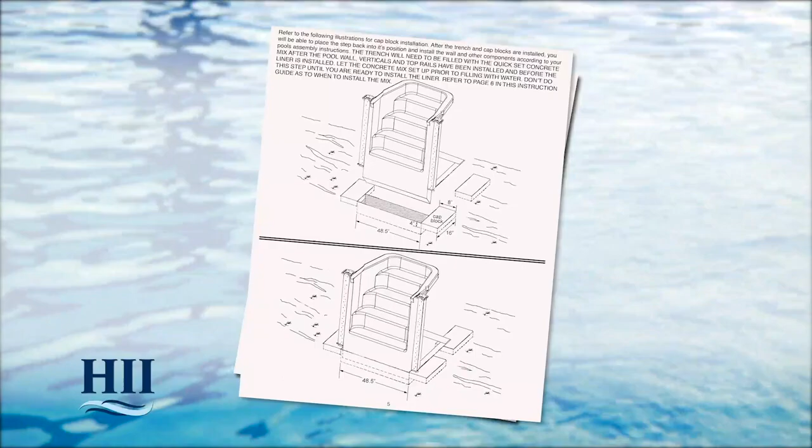This installation video is designed to supplement HII's pool assembly and installation instructions for your style of pool. This video does not replace the written instructions. Be sure to read all instructions carefully prior to installation. Check to see if building permits or utility clearances are required, and obey all codes for fencing and electrical safety. Refer to your pool assembly and installation instructions.

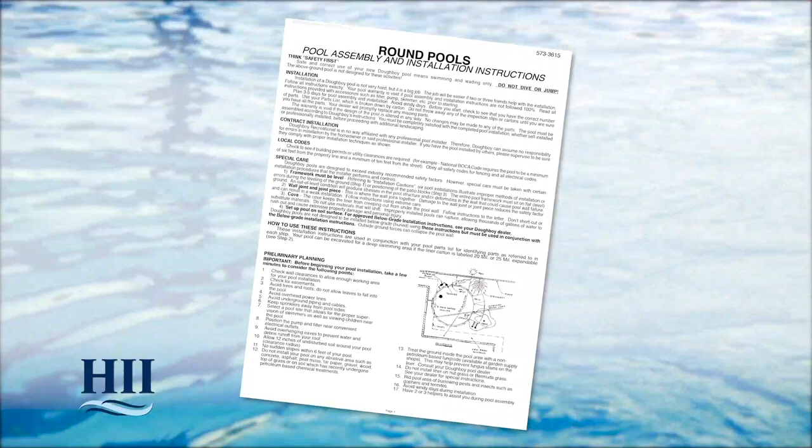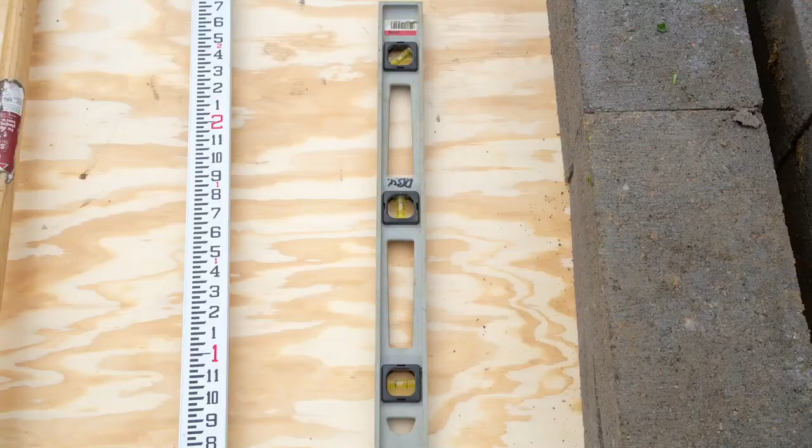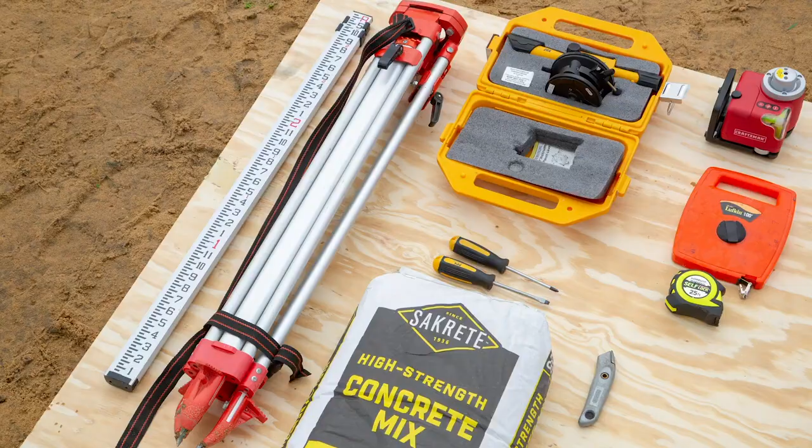Tools and materials. In addition to the tools and materials required in the pool assembly and installation instructions for your pool, you will need the following items: a 2-foot carpenter's level, a 1/4-20 by 1-inch slotted or Phillips head screwdriver, sharp utility knife, a flat end shovel to help with a more precise excavation, a round shovel, measuring tape. A transit or builder's level is recommended to help with leveling the in-wall pool step.

You will need 8 4-inch by 8-inch by 16-inch solid concrete cap blocks and 5 60-pound bags of quick-set concrete for the step trench.

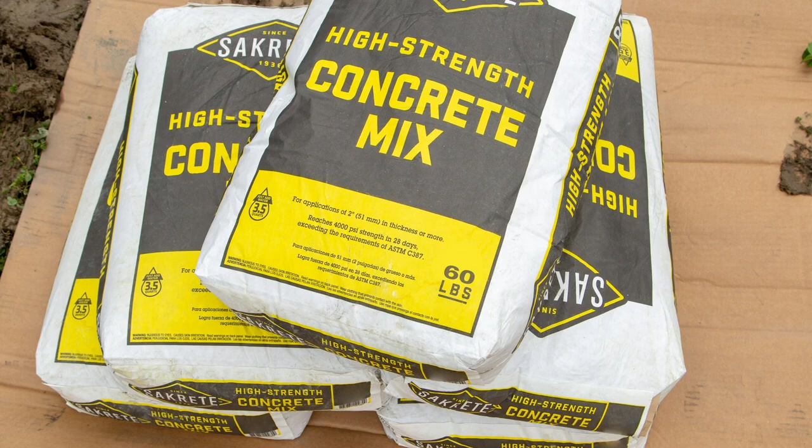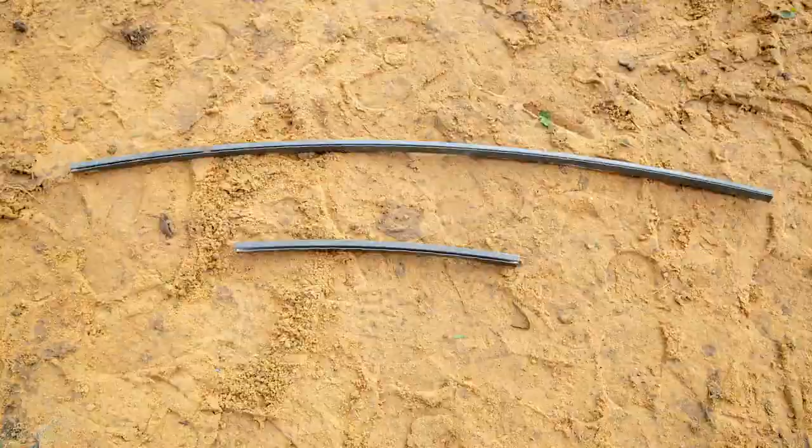Important: the step is installed in place of one bottom rail and top rail section for most pools. Some round pools with extra long bottom rails will require the use of 2 short bottom rails and 2 short top rails to make up the distance. Refer to Figure 4A as illustrated in your written instructions for an example.

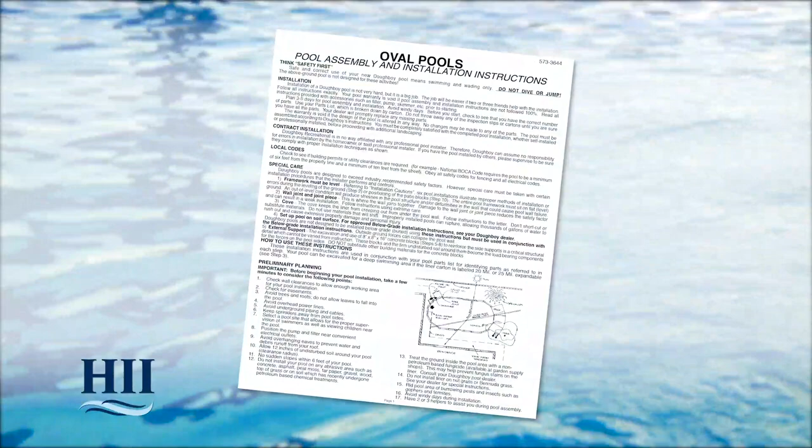The step is intended to be used in-ground or with a deck. The step must have a deck support around it to prevent any misuse entering or exiting the pool. Follow the directions in your pool's assembly guide until you have completed the section on laying out the bottom rail framework. See Figure 1 in the in-wall pool step instructions.

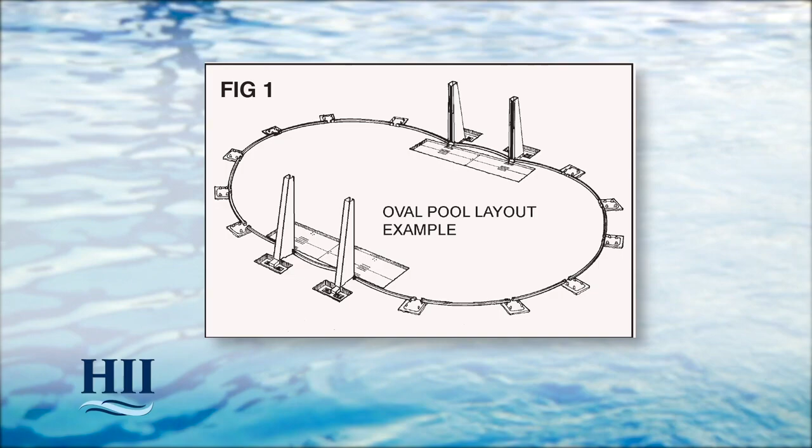At this point, you will need to decide where you want to locate the pool step. Remember, the step can only be located at the radius ends of an oval. See Figure 2 in your in-wall pool step instructions.

The skimmer and return holes in the pool wall will be located to the left of the step when standing inside the pool area and facing the step, so keep this in mind when locating the pool step.

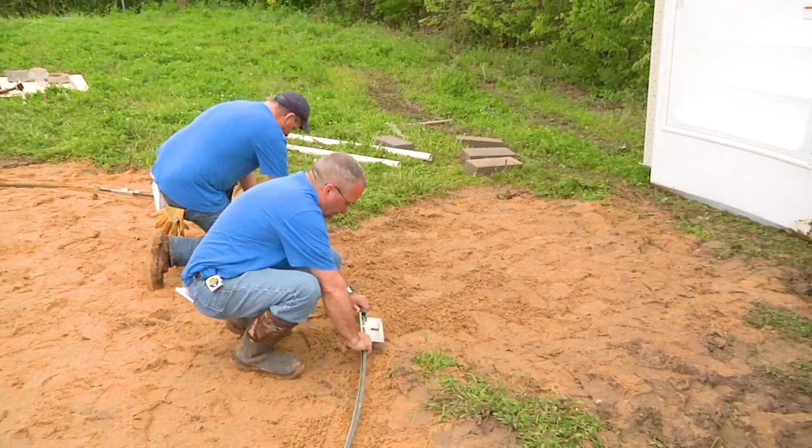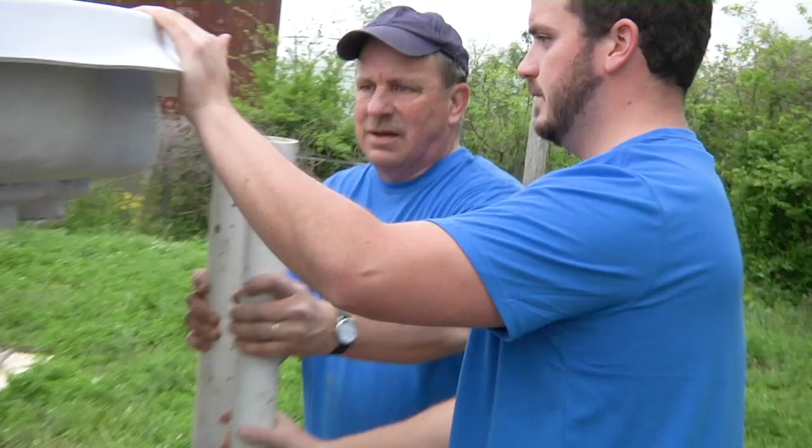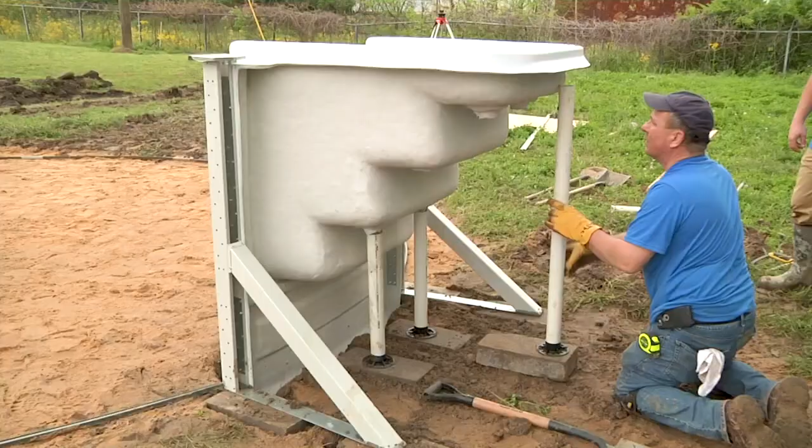Locate the PVC support pipes to temporarily support the steps while positioning cap blocks. The diagram shows cap blocks numbered 1 through 8 and dimensions for the support pipe locations when centered on the cap blocks numbered 5 through 8.

Locate the area where the blocks 1 through 4 will be placed. The cap blocks are required and must be used to prevent the support post and the support brace from sinking into the ground. Warranty will be voided if not used.

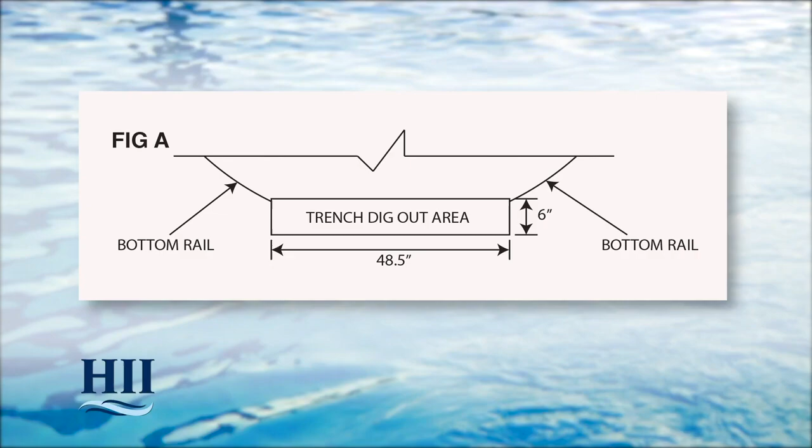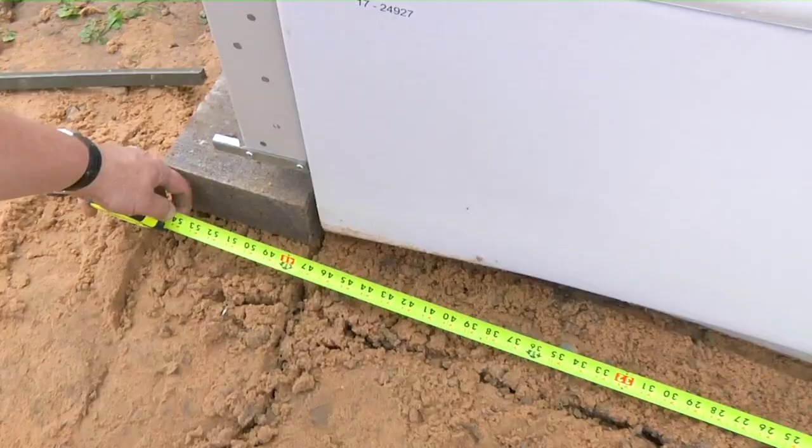Refer to Figure A in your in-wall pool step instructions for help marking out an area for the step trench. Mark a 3-inch trench in the front of the step and a 3-inch trench in the back of the step, for a final trench size of 6 inches by 48.5 inches by 12 inches for the bottom of the step to rest in. Now you may remove the step for excavation of the trench and blocks 1 through 4.

Make sure all the blocks are level to the surrounding area. Once the trench is excavated, you will be able to place the step in its location.

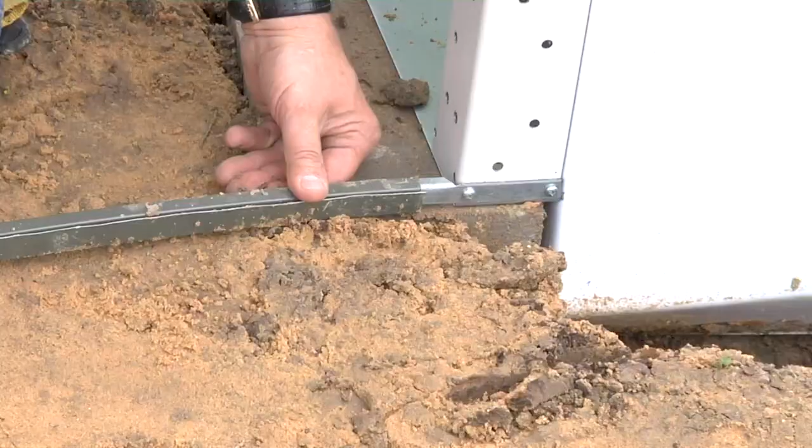With help, position the step assembly in place and insert the bottom rails onto the bottom rail locators on each side of the step. Now locate the position of blocks 5 through 8.

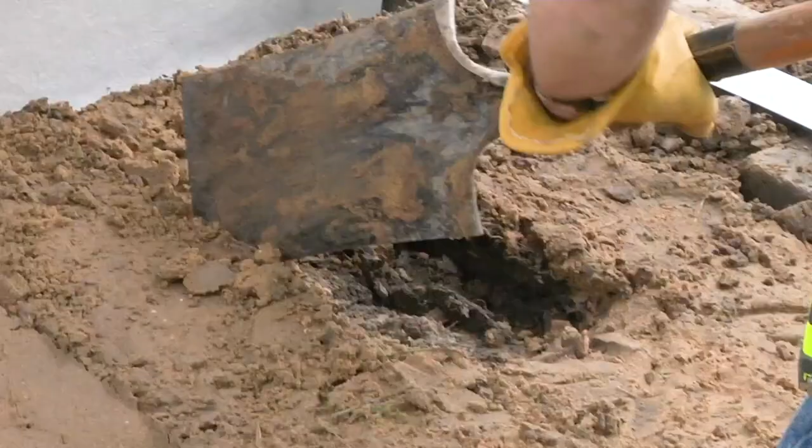Scribe the blocks. Excavate blocks 5 and 6 first. Make sure all blocks are level with the surrounding area.

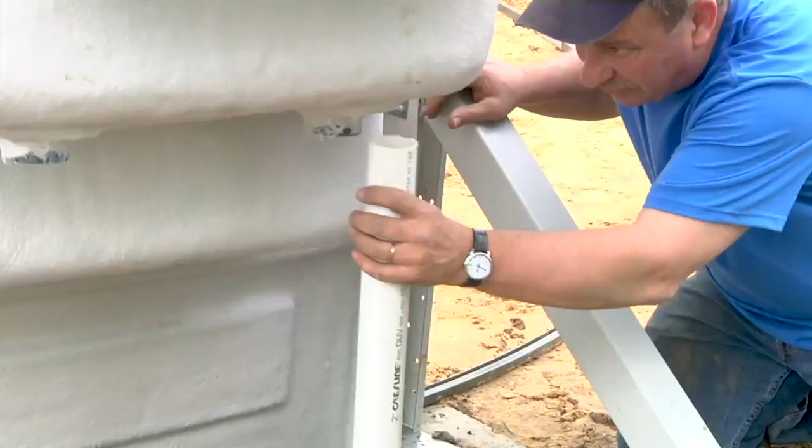Next, determine the length of the PVC pipes for each block. Cut the size and insert pipe into the hole of the step. Repeat these steps for all pipes and cap blocks.

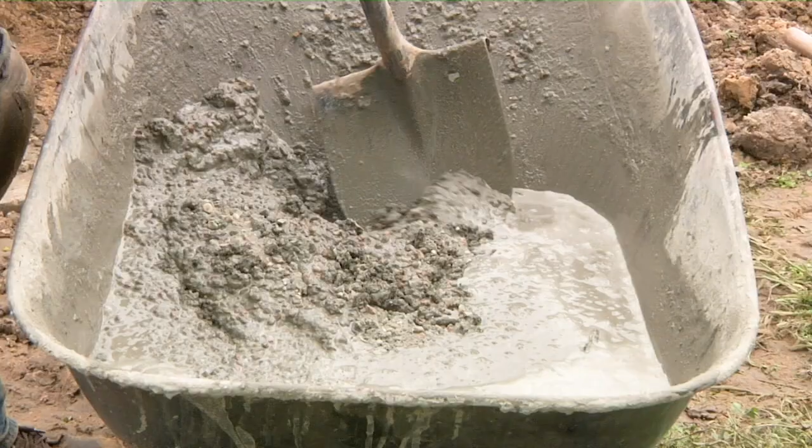Make sure the step sits level on top of the patio blocks and adjust if needed. The trench will need to be filled with quick-set concrete mix after the pool wall, verticals, and top rails have been installed and before the liner is installed.

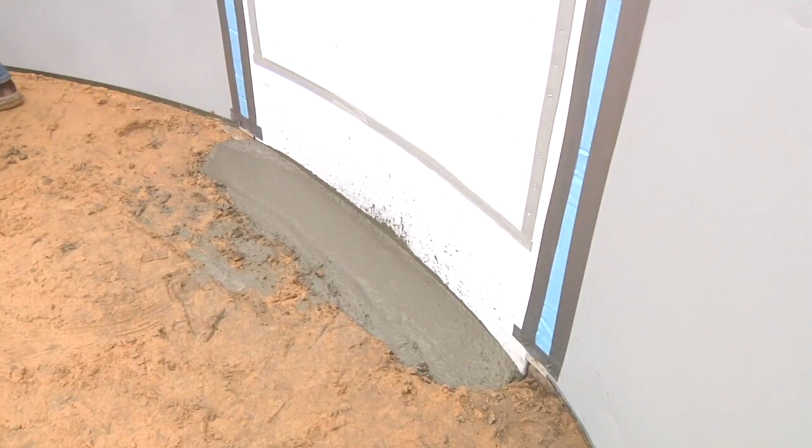Let the concrete mix set up prior to filling with water. Don't perform this step until you are ready to install the liner.

Refer to your instruction guide as to when to install the mix. Be sure to measure the diameter of your bottom frame once the step is in place to make sure the diameter is correct for your pool size. No cutting of top rails or bottom rails is needed.

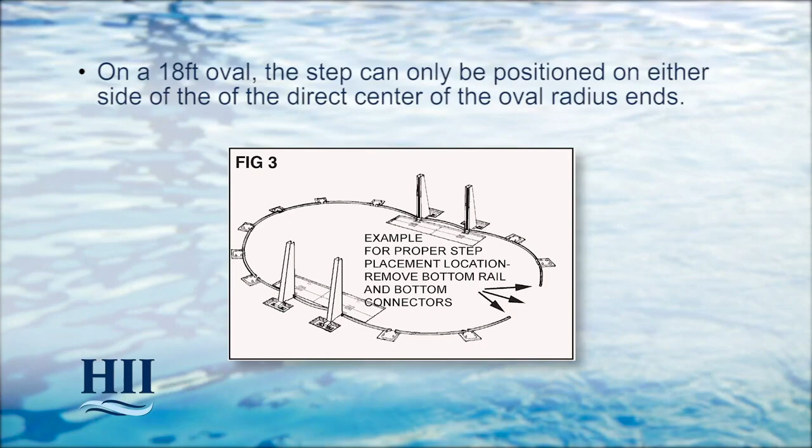On an 18-foot oval, the step can only be positioned on either side of the direct center of the oval radius ends. Refer to Figure 4B on page 2 for step placement and short bottom rail placement.

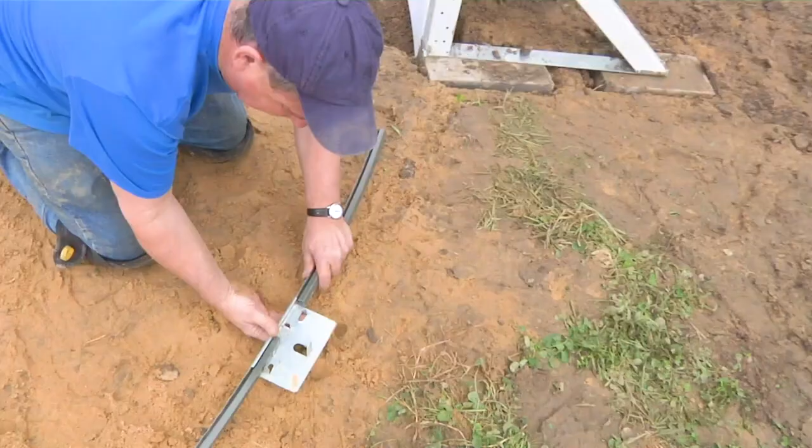If your pool came with 2 short bottom rails, the short bottom rails are placed on the bottom rail locators and bottom connectors closest to the step as shown. There will also be 2 shorter top rails that will be used where the shorter bottom rails are located.

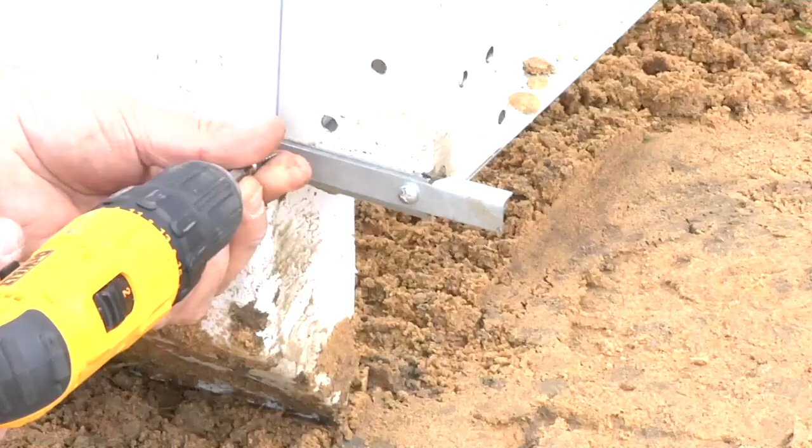If your pool step doesn't have the bottom rail locators already assembled, attach the left and right bottom rail locators to the bottom of the step as shown in your in-wall pool step instructions.

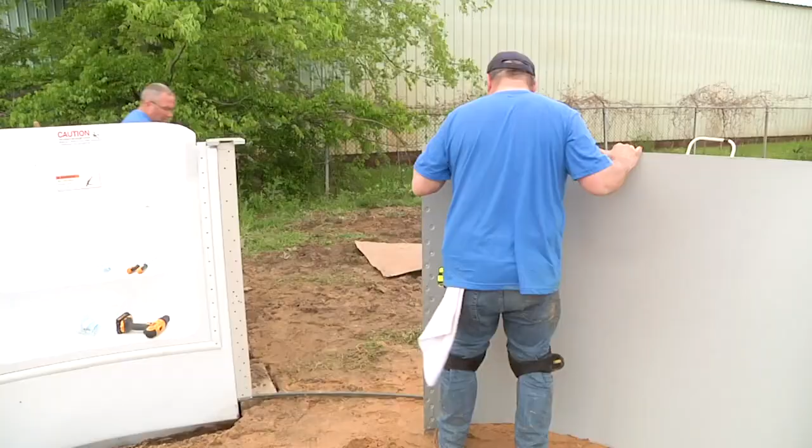Refer to your pool's assembly guide about installing the wall before starting this step. Start the pool wall on the right side of the step assembly by uncoiling the pool wall about 6 to 10 feet and insert the bottom edge into the groove in the bottom rail track.

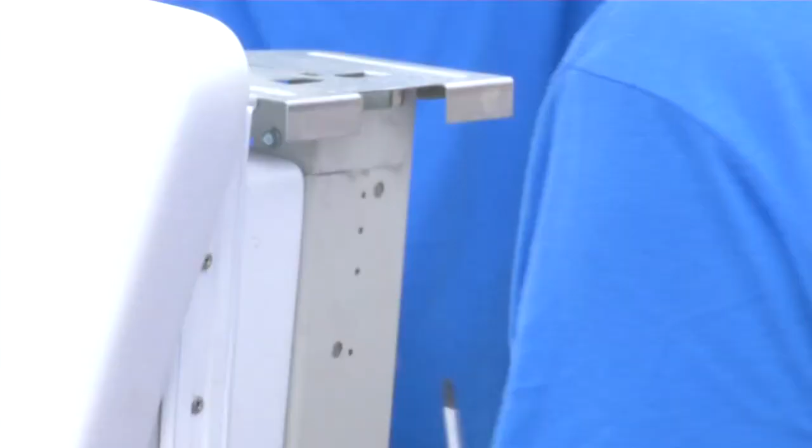Slide the end of the wall jointly towards the step until the holes in the wall joint line up with the holes in the step vertical. Be sure the top edge of the wall slides under the vertical end cap before fastening wall to vertical.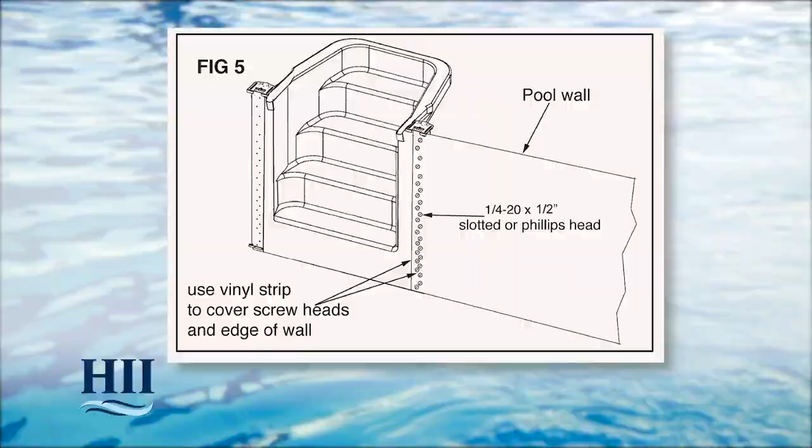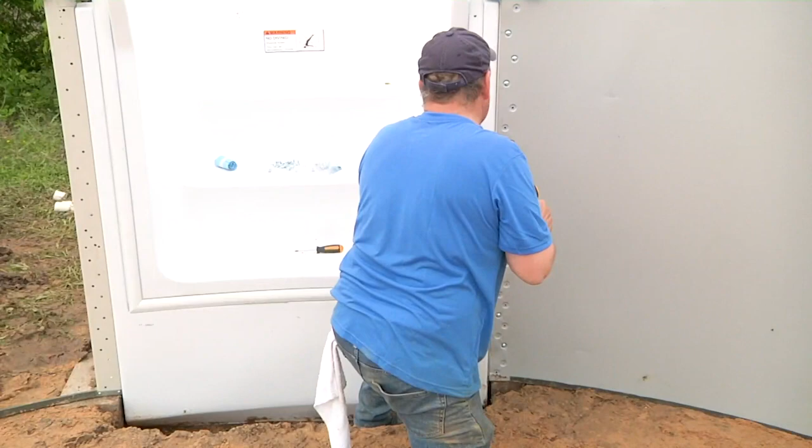See Figure 5. Insert a 1/4-20 by 1/2 inch long panhead screw with the screw head to the inside of the pool wall and a 1/4-20 lock nut on the inside of the vertical. Loosely attach all the screws and nuts first, then tighten them securely.

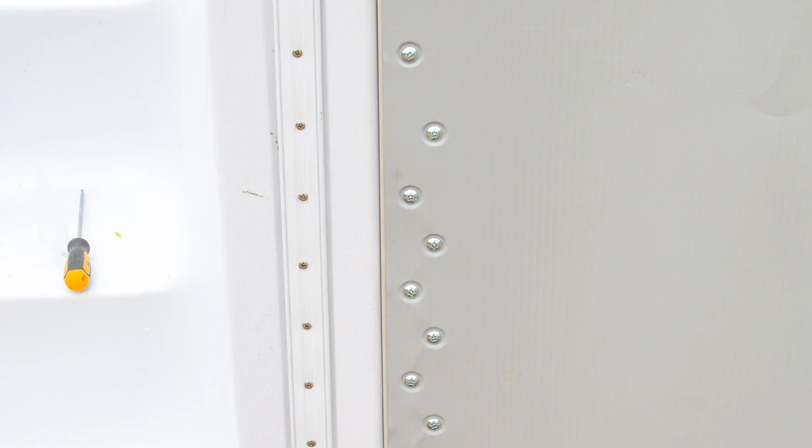Recheck the tightness of the screws and nuts at least twice to ensure a proper seat. File off any sharp burrs on the screw heads. Then place the protective wall strip over the screws and the edge of the pool wall and secure with duct tape. Be careful and do not get any tape over the gasket sealing area.

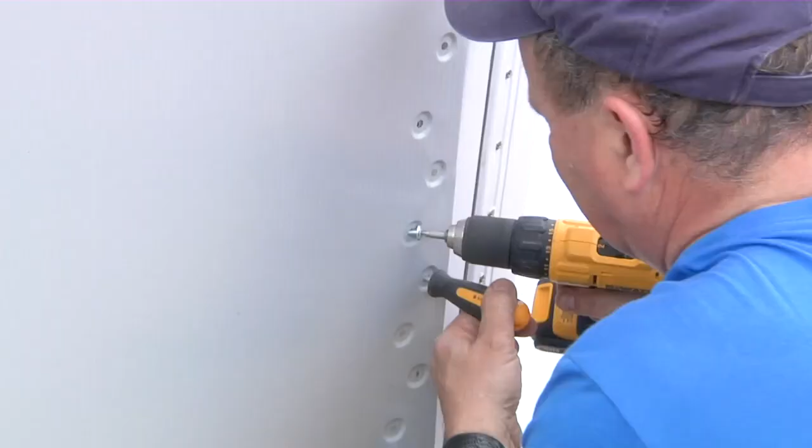Finish installing the wall around the perimeter of the pool until you reach the other side of the step and repeat the steps above to attach wall to step vertical.

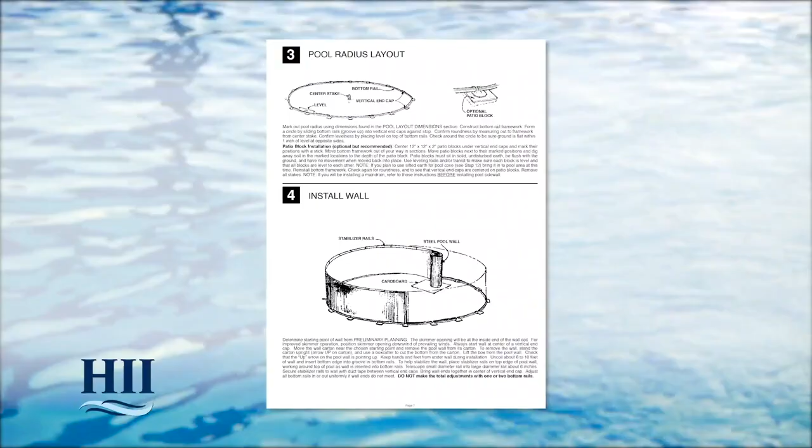Refer to your pool's assembly guide for directions on installing the wall to help ensure the wall is installed correctly. When installing the bead receiver for a beaded liner, stop the receiver on the outside edge of the step and over the gasket.

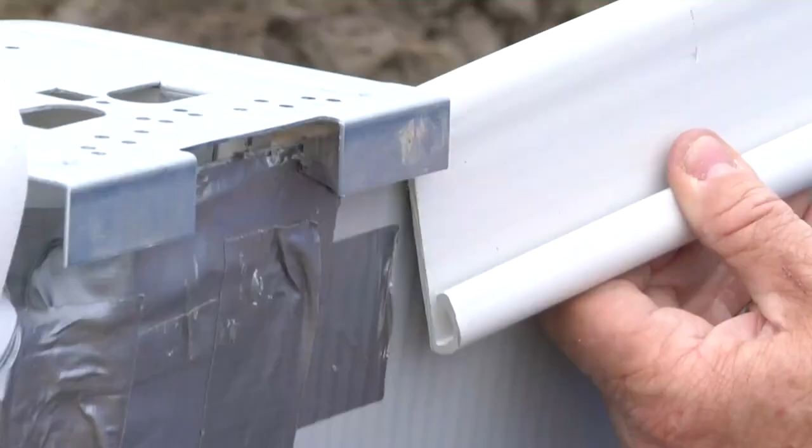You will need to cut approximately 1.5 inches off the top of the step faceplate so it will fit at the bottom edge of the bead receiver. See illustration at the bottom left of page 3.

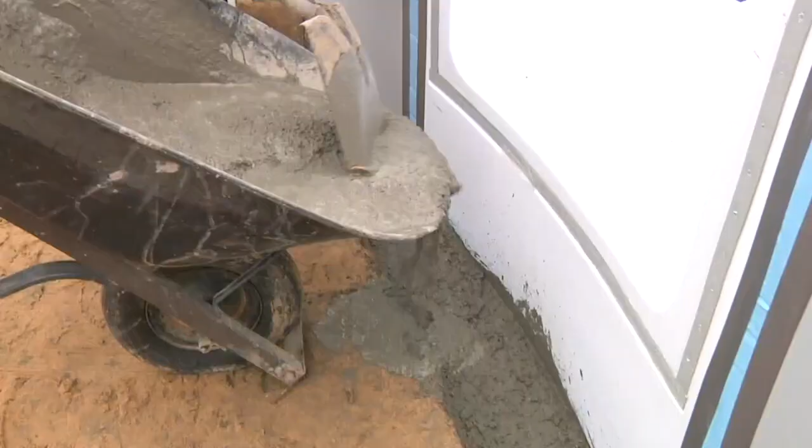Now is the time to fill the trench with quick-set concrete mix. Fill the trench with the mixture from the inside and outside of the step and let it cure before installing the liner. If the mixture does not completely fill the trench, fill the remaining area with dirt and pack down firmly so it is level with the surrounding area.

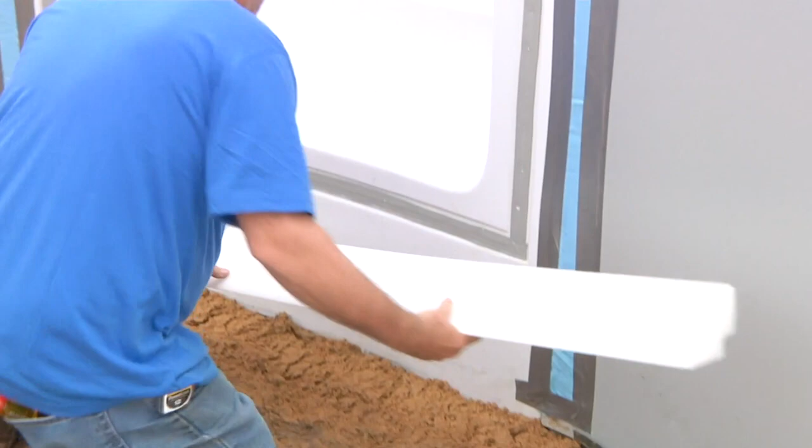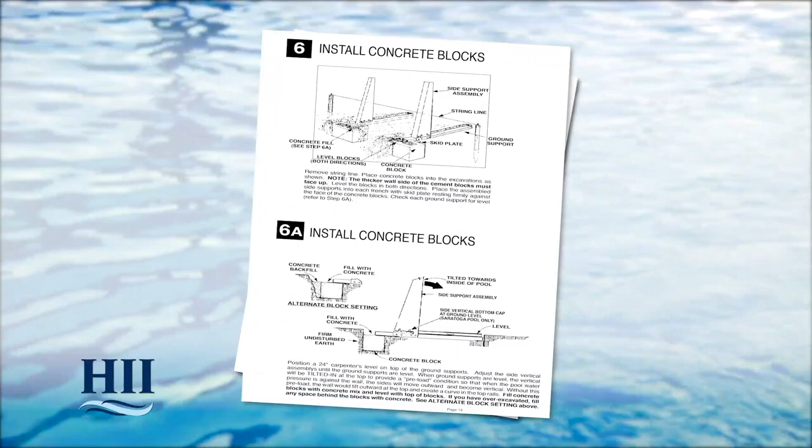You will need to place a piece of preformed cove or build a dirt earth cove at the base of the pool step approximately 4 inches high. Return to your pool's assembly guide to install verticals, top rails, and other hardware and pool cove.

Before you install the liner, you will need to remove the faceplate strips from the step. Make sure the gasket remains attached to the step.

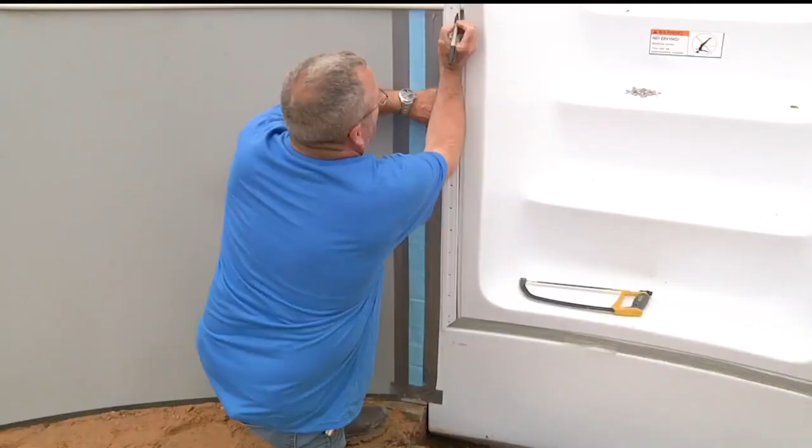When installing the bead receiver for a beaded liner, stop the receiver on the outside edge of the step and over the gasket. You will need to cut off a portion from the top of the step faceplate so it will fit at the bottom edge of the bead receiver.

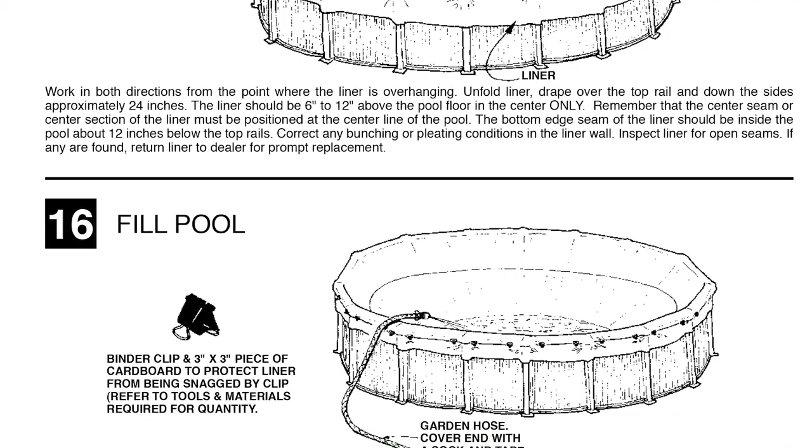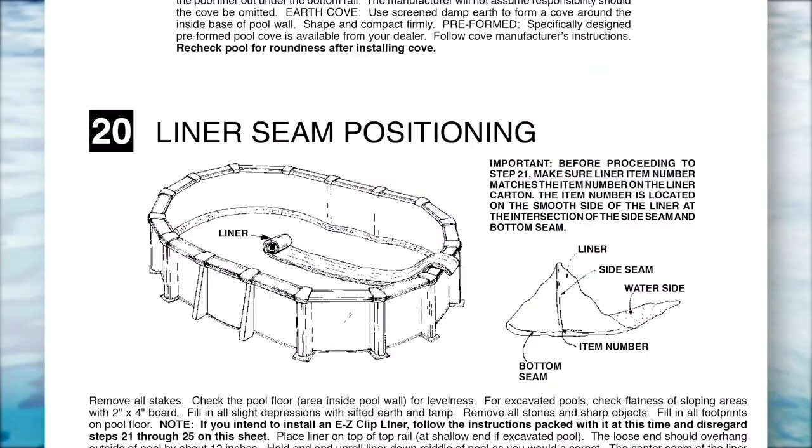Install the liner per the instructions included with the liner or your pool's assembly guide. If you are installing a beaded liner, you will need to start the liner on each side of the step approximately 6 feet, then continue around the pool installing the liner into the bead receiver. Before installing an oval liner, make sure the liner is aligned correctly with the pool layout.

Water method option for setting pool liner. When you start filling the pool with water, you will need to pay close attention to the liner at the step area for any wrinkles and adjust them as needed immediately. You will not be able to do this once the water level reaches a certain depth because there will be too much weight on the liner to press out any wrinkles.

When the water depth is approximately 10 inches for 52-inch tall pools or 12 inches for 54-inch tall pools, and the liner is against the pool wall at the bottom, you will fasten the bottom faceplate strip to the pool step first using the supplied screws.

Sandbag option for setting pool liner. Refer to instruction guide.

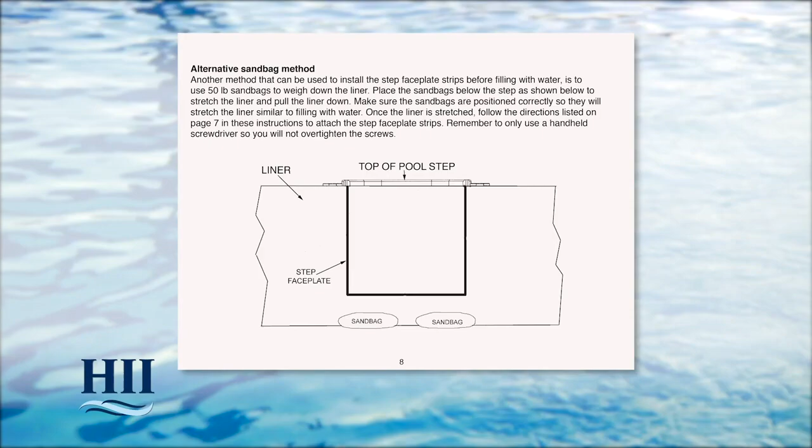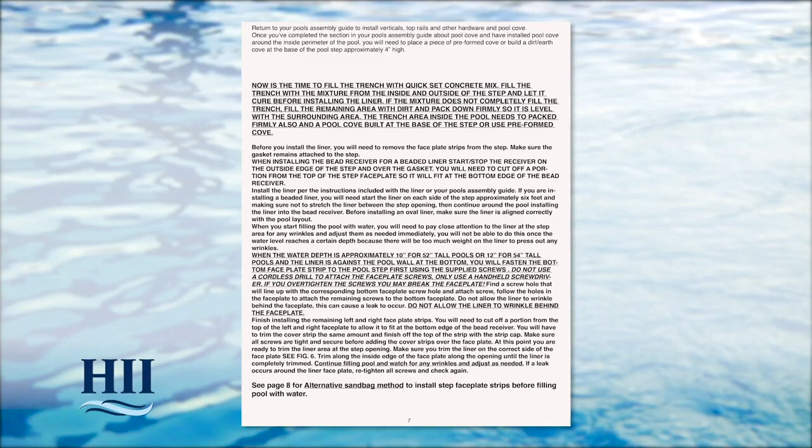Another method that can be used to install the step faceplate strips before filling with water is to use two 50-pound sandbags to weigh down the liner. Place the sandbags below the step as shown in the alternative sandbag method in the instructions to stretch the liner and pull it down. Make sure the sandbags are positioned correctly so they will stretch the liner similar to filling with water.

Once the liner is stretched, follow the directions in the instructions to attach the step faceplate strips. Remember to only use a handheld screwdriver so you will not over-tighten screws. Do not use a cordless drill to attach the faceplate screws. Use a handheld screwdriver only. Over-tightening the screws may break the faceplate strips.

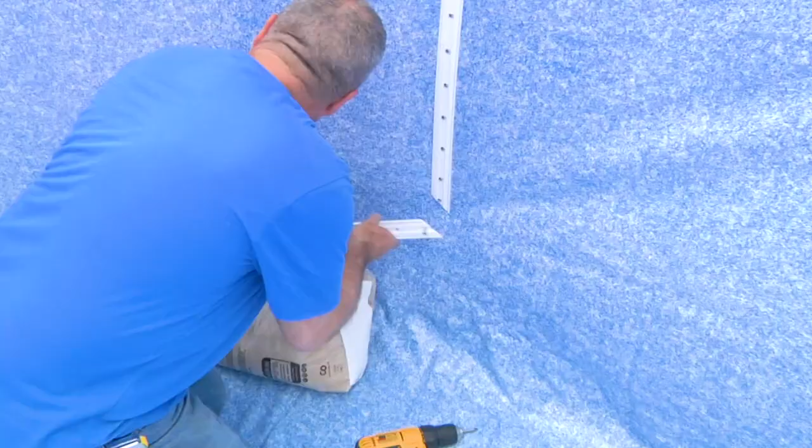Find a screw hole that will line up with the corresponding bottom faceplate screw hole and attach the screw. Follow the holes in the faceplate to attach the remaining screws to the bottom faceplate. Very important note: do not allow the liner to wrinkle behind the faceplate. This can cause a leak to occur.

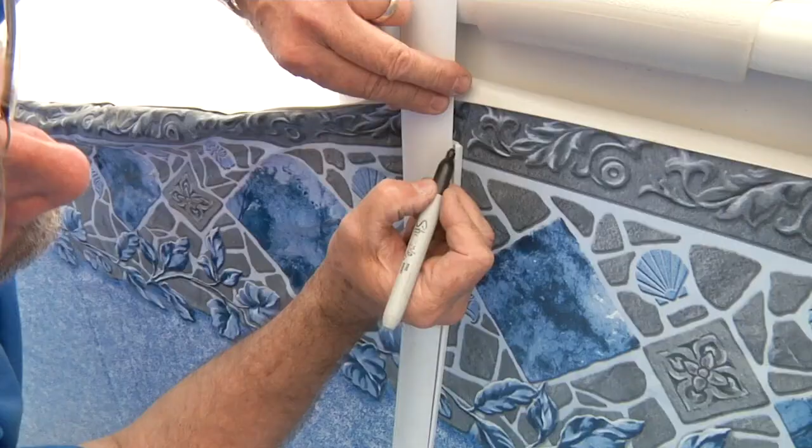Finish installing the remaining left and right faceplate strips. You will need to cut off a portion from the top of the left and right faceplate to allow it to fit at the bottom edge of the bead receiver. You will have to trim the cover strip the same amount and finish off the top of the strip with the strip cap. Make sure all screws are tight and secure before adding the cover strips over the faceplate.

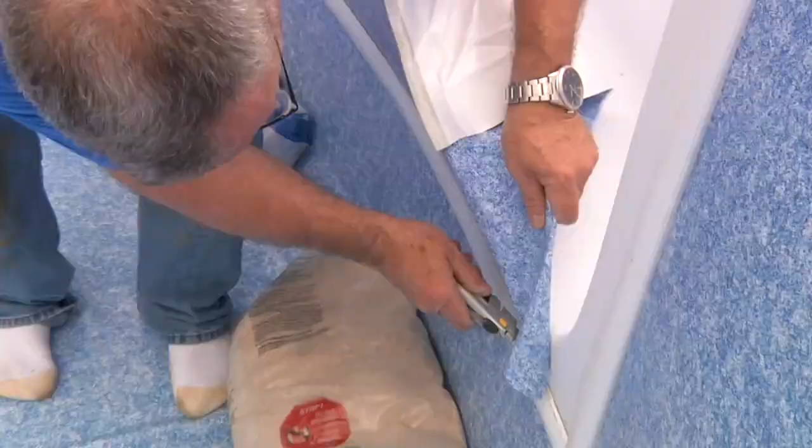At this point, you are ready to trim the liner area at the step opening. Make sure you trim the liner on the correct side of the faceplate as illustrated in your in-wall pool step instructions. Trim along the inside edge of the faceplate along the opening until the liner is completely trimmed. Continue filling the pool and watch for any wrinkles, adjusting as needed.

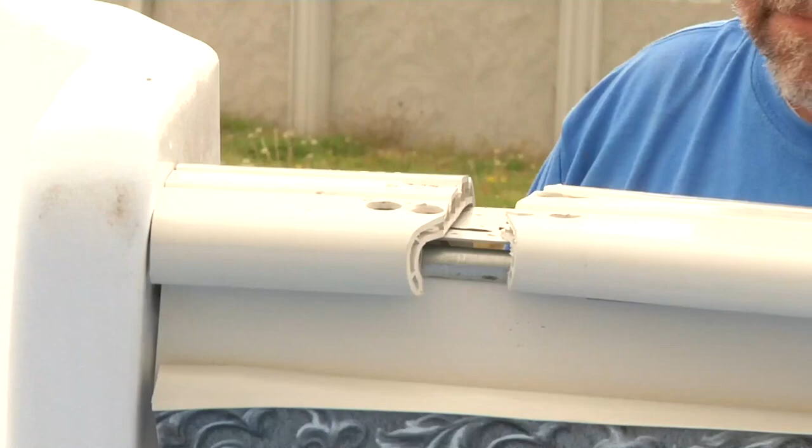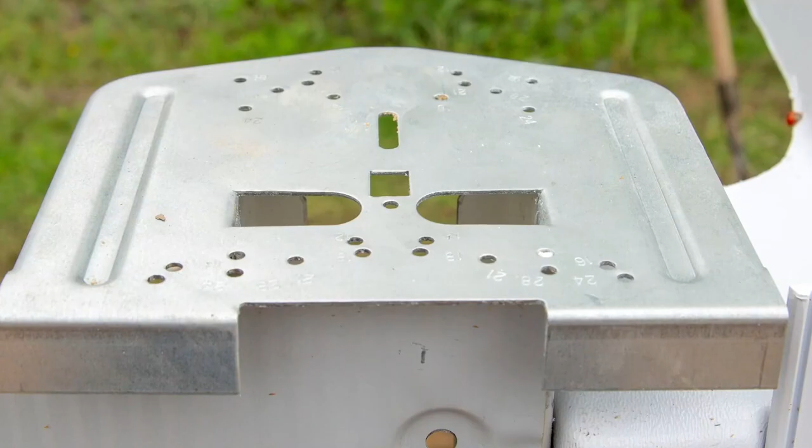Attach the top rails on both sides of the step assembly before attaching any other top rails. Reference the illustration in your in-wall pool step assembly guide when attaching each top rail to the vertical end cap on the step. The hole pattern shown is only for the vertical end caps on the step assembly.

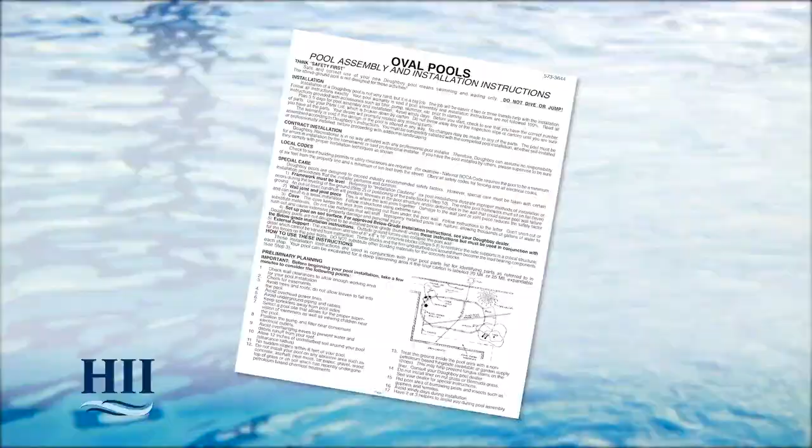Once these top rails are attached, refer to your pool's assembly guide to finish attaching all other top rails using the correct hole pattern for your pool. Make sure to follow your pool's assembly guide instructions to complete the pool assembly.

Be sure to follow your instructions and this video very carefully. Pool failure may occur if the step assembly is not done correctly. Be sure to use all bolts, washers, nuts, and hardware included, and make sure all are installed correctly.

If you are not sure of the proper assembly, please review your instructions and this video. If you have any questions concerning the correct installation, please contact customer service at 1-877-228-4586. Important: above-ground pools are designed for swimming and wading only.

Do not dive or jump. Misuse of your pool may result in crippling injury and/or other dangers to life and health. Do not use slides, diving boards, or any other platform or object which can be used for improper pool entry.

Use only an above-ground swimming pool ladder or entry system to enter or exit your pool. Never attempt to swim or reach behind ladders or any other pool entry system. It is the pool owner's responsibility to secure the pool against unauthorized, unsupervised, or unintentional entry.

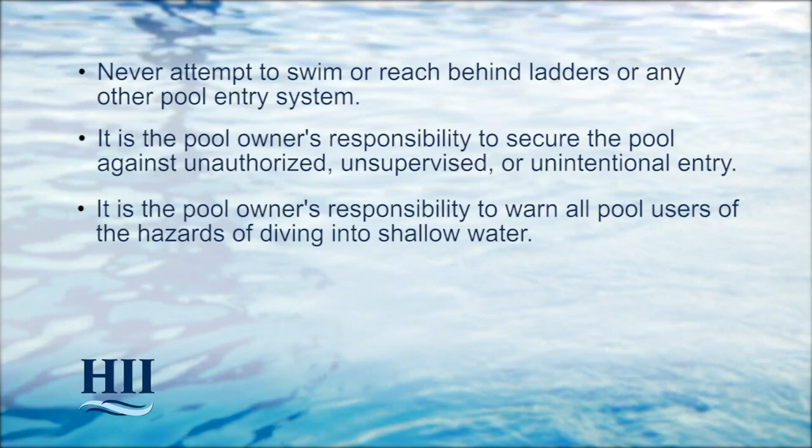It is also the pool owner's responsibility to warn all pool users of the hazards of diving into shallow water. Paralyzing injury may result. Always obey all safety rules. Remember, pool safety is everybody's responsibility.

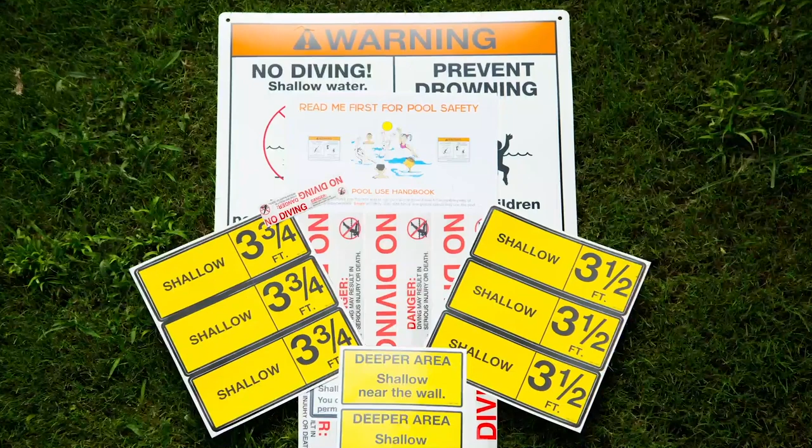Safety decals and caution information provided with your pool have been endorsed by the U.S. Consumer Product Safety Commission. It is mandatory that the pool owner and installer follow the installation and use directions for all provided safety signs and decals. Juveniles must be supervised at all times by a responsible adult as directed by the USCPSC.

Change of design: the manufacturer expressly reserves the right to change or modify the design and construction of any product in due course of their manufacturing procedures, without incurring any obligation to furnish or install such changes or modifications on products previously or subsequently sold.